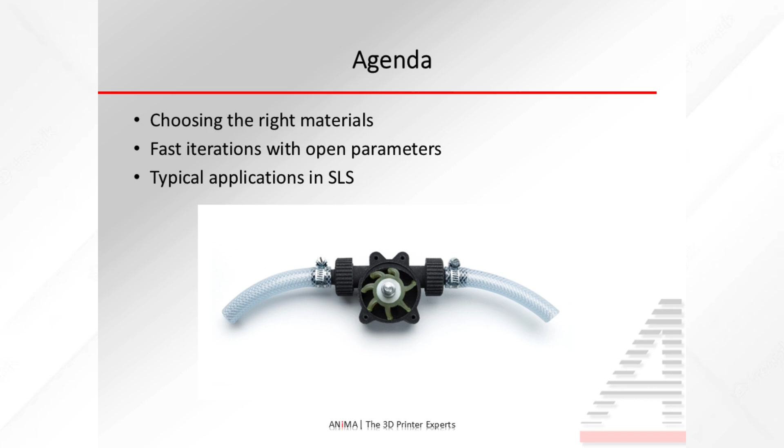Today we're going to guide you through how the Sinterit LISA X can unlock the potential of selective laser sintering, or SLS. We'll focus on three key areas: choosing the right materials, accelerated development through open parameters, and typical applications where SLS delivers the most value.

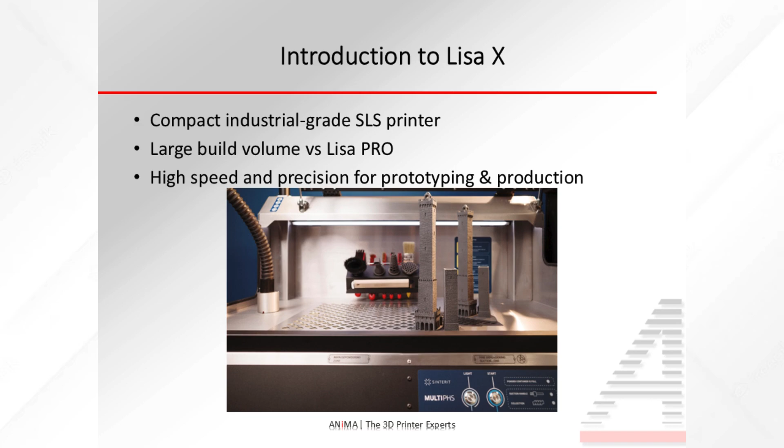To start with the printer: the LISA X is Sinterit's compact industrial-grade SLS printer. Compared to the earlier model, LISA Pro, it has a larger build volume and is much faster, making it suitable not only for prototyping but also for small batch production. Its balance of precision, accessibility, and industrial performance makes it one of the most versatile machines in its category.

SLS is all about material properties, and LISA X supports a wide range. PA12 Smooth, for example, is the workhorse—durable, strong, and reliable for general use. PA11 Onyx is more flexible and impact resistant, and also biocompatible, so it works well for medical and wearable parts. Then we have Flexa materials, which are TPU-like powders, ideal for flexible parts like gaskets or wearables. And we have polypropylene and composites for lightweight, chemical-resistant parts.

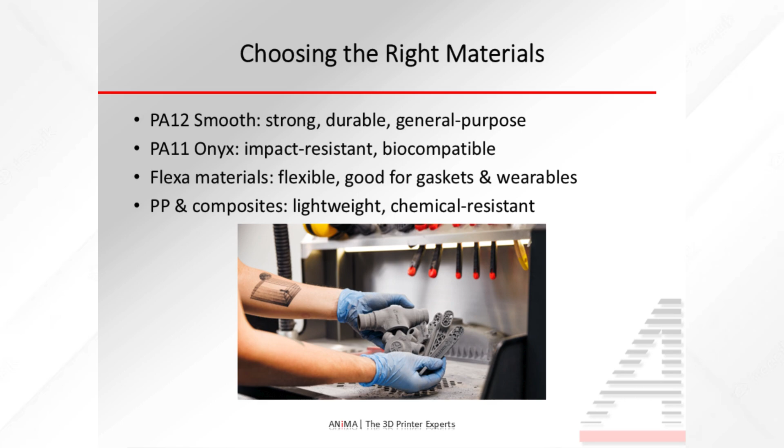I have to say here, lightweight parts also have chemical resistance to some chemicals. This diversity allows us to match the material to the job instead of compromising.

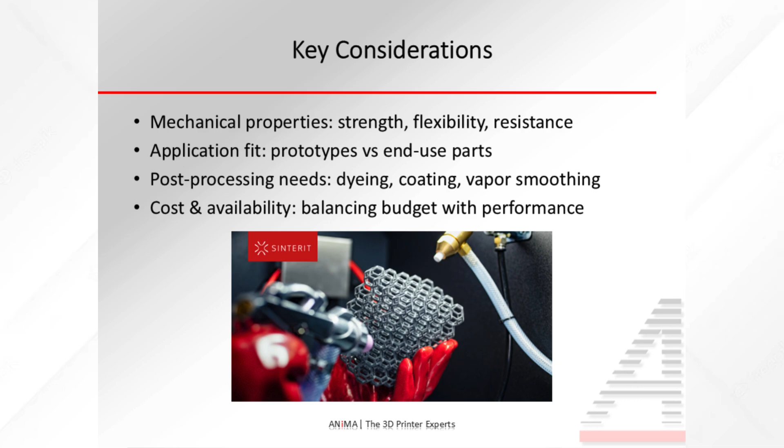When choosing a material, we consider four key aspects. First, mechanical properties: do we need stiffness, flexibility, or impact resistance? Second, the application: are we making prototypes, functional testing parts, or actual end-use components? Third, post-processing needs: some materials dye beautifully or can be smoothed for aesthetics. And finally, cost and powder availability, which are important for scaling projects.

For the decision framework, let's say we start from your application's requirements—what's the problem the part has to solve? Then narrow down the options based on mechanical and thermal properties. And finally, consider sustainability: LISA X supports powder with good refresh rates, which reduces waste and lowers costs.

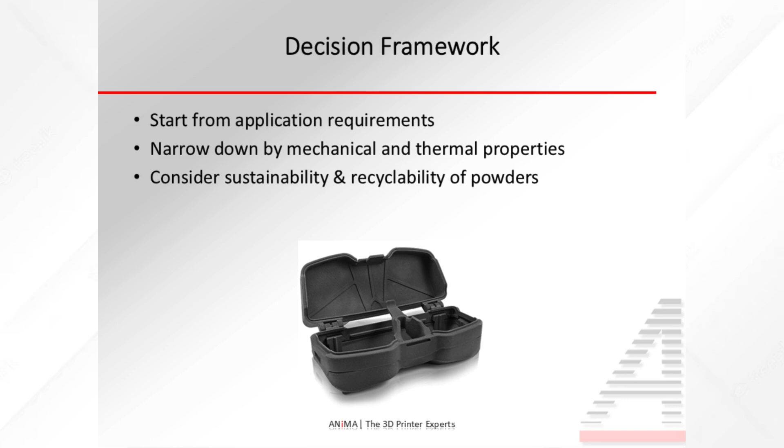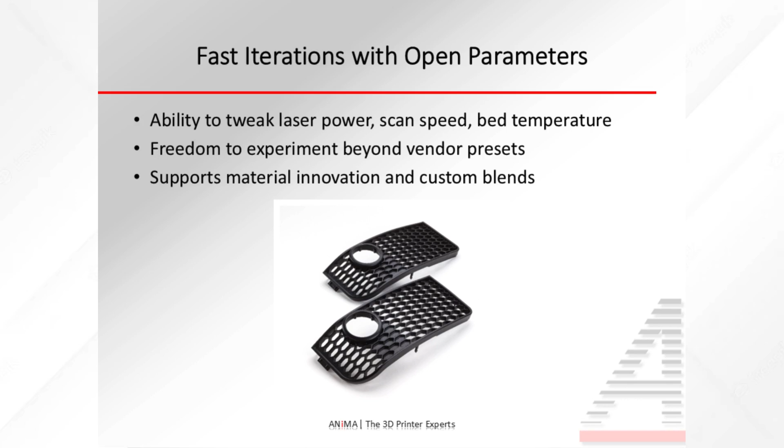Let's talk a little about the open parameters this machine supports. One unique strength of this machine is its open parameter system. Unlike locked printers, it allows us to fine-tune variables like laser power, scan speed, and bed temperature. This gives us the freedom to adapt standard profiles or even experiment with new powders without being tied to preset recipes.

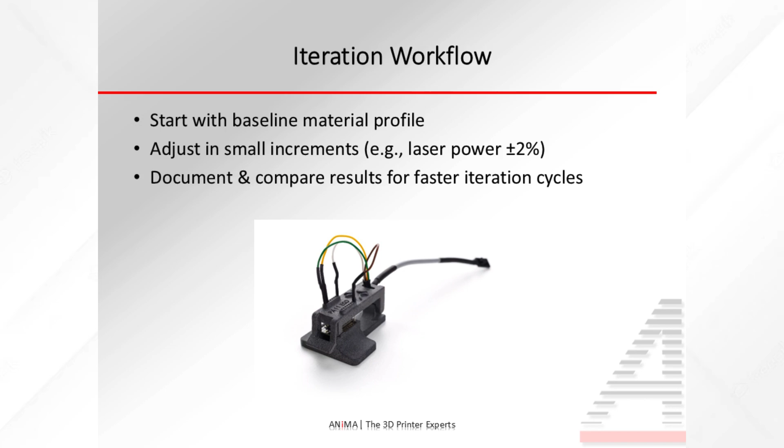A typical workflow looks like this: we start with a baseline profile inside the Sinterit software, then adjust the parameters in small increments—for example, changing laser power by 2%, or increasing or decreasing bed temperature by 1 or 2 degrees. After each print, we document results, compare them, and refine further. This loop lets us quickly optimize both quality and performance.

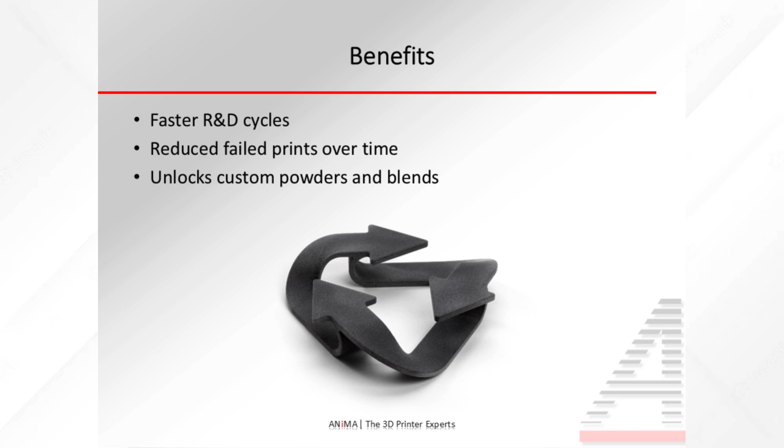The benefit of all this is speed. R&D teams can test more variables in less time. Failures turn into learnings faster, which shortens development cycles. And beyond that, it opens the door to using custom powders or blends that might not be officially supported yet, giving you an innovation advantage.

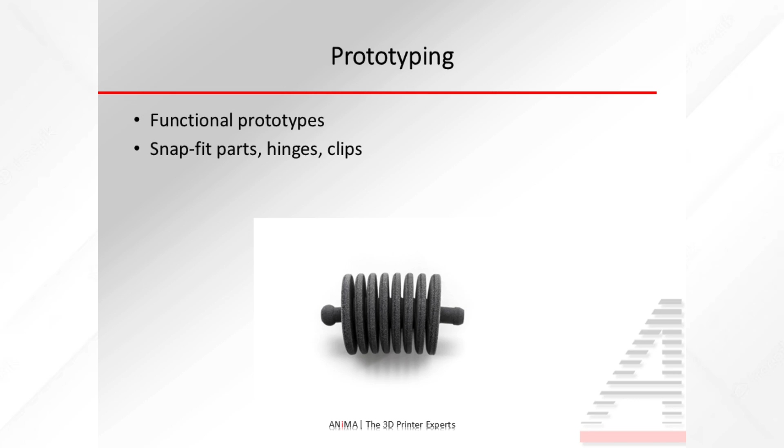Of course, one of the most common uses of the printer and SLS technology is prototyping. With SLS, we can have functional prototypes that look and feel like final products—for example, snap-fit parts, enclosures, hinges, and clips can be tested under real conditions before committing to mass production.

More and more companies use the LISA X for end-use parts. Examples include spare parts for machinery, customized jigs and fixtures in manufacturing, or lightweight components in automotive and aerospace. Because there's no need for tooling, SLS is perfect for low volume production and customization.

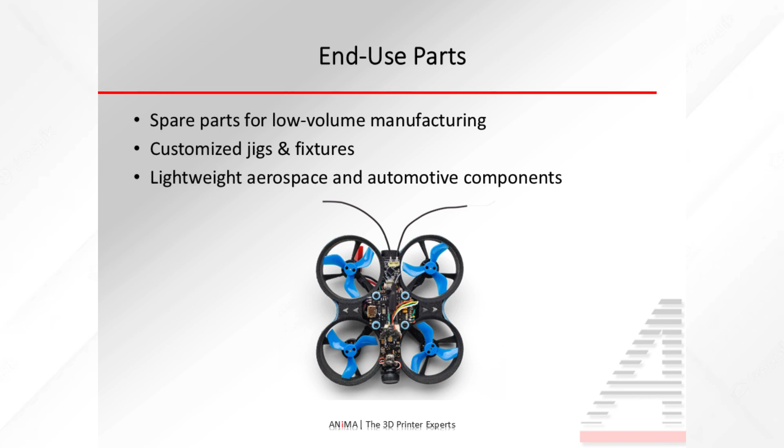Finally, specialized fields are embracing LISA X. In healthcare, PA11 is used for orthotics and prosthetics because of its biocompatibility. In wearables, flexible TPU-like materials create comfortable and durable products. And in research, the open parameters make it possible to experiment with niche materials for cutting-edge innovation.

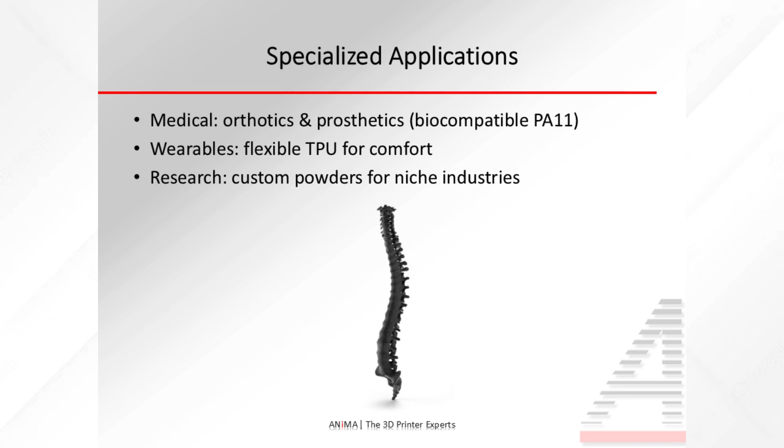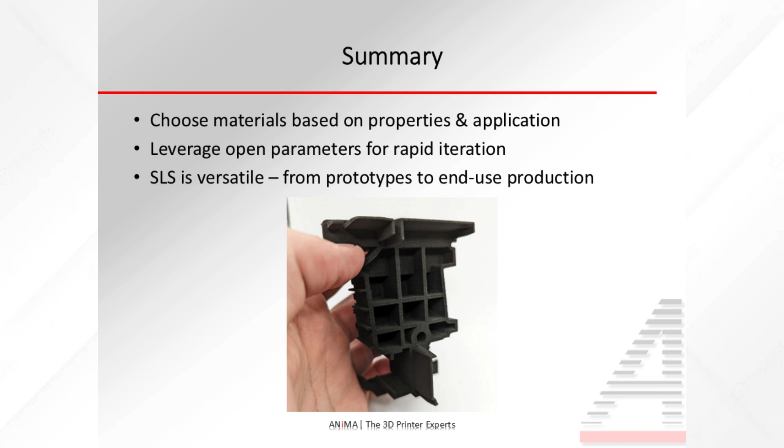To summarize what I've presented: choosing the right material ensures parts perform as intended. The open parameters accelerate learning and reduce iteration time. And SLS with the LISA X is versatile enough to cover the entire spectrum, from prototypes to functional end-use products. That's why it's such a powerful tool for innovation. This was a small presentation covering these three topics.